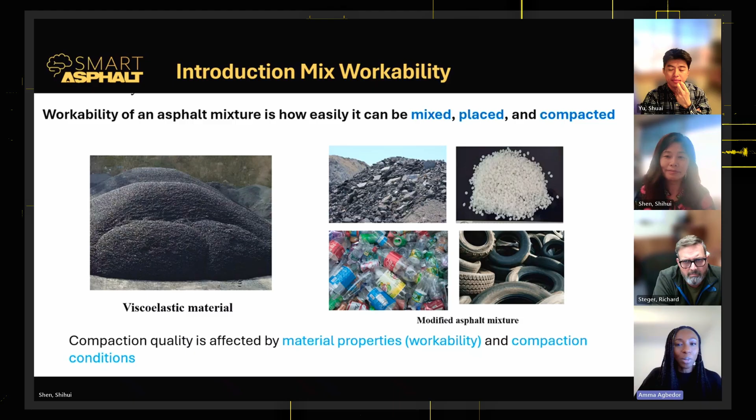Great, thank you so much. And so understanding what workability is, could you tell us about how this led to your research into this SmartRock technology? Yeah. So the history of the SmartRock can be dated back to 2014 and 2015, when Dr. Hai Huang from Penn State Altoona, who is an expert in rail track research, was looking for a tool to monitor railroad ballast performance and behavior. Under funding from the Federal Railroad Administration, Dr. Huang invented a wireless MEMS sensor, SmartRock, to mimic the behavior of railroad ballast under train loading.

The first generation SmartRock is about 33 millimeters, and the external shell can be 3D printed so that it has the exact shape and angularity as a ballast particle. Inside of it, it includes a number of sensing units, so it can measure the translation, rotation, acceleration, temperature, and contact force of the particle. The service temperature of the first generation SmartRock is up to about 80 degrees Celsius, and it has a sleep mode function to save battery life. Since its development, the railroad version, or the large version SmartRock, has been widely implemented in railroad research to study ballast stability, geogrid performance, and track conditions.

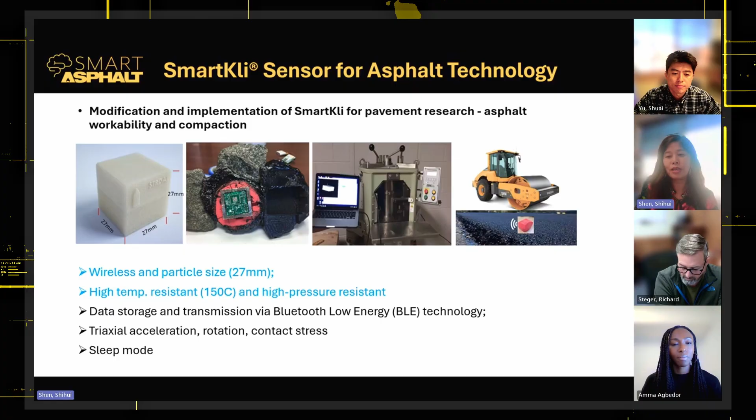All other features like wireless data transmission, rotation, acceleration measurement, and sleep mode capabilities all remain the same. The newer version is trademarked as SmartKli and was implemented to study many asphalt mixture behaviors, including the workability characteristics we are discussing today.

So I guess based on that background history, you engaged in this project to figure out workability parameters that you could use, because you have to have a way of measuring it, right? And I guess that's the work that was done by Dr. Yu, so maybe you can give us some information about that.

Okay, so I'm gonna use several minutes to introduce how we used the SmartRock to do our workability analysis. So during asphalt mixture compaction, we have a central hypothesis that the motion characteristics of the asphalt mixture particles have a direct impact on its workability and compactability. But before our research, how the particles were rotating and moving under the compaction load was still unclear.

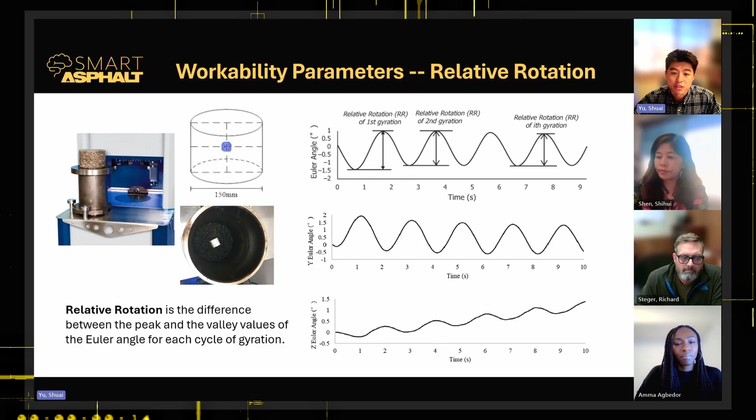So here, we declare a new parameter, relative rotation, which is the difference between the peak and valley of the Euler angle of the SmartRock for each gyration. During the compaction, we collected all of this relative rotation curve, and it shows here. We could notice that at the beginning of the compaction, the particle rotation is more dramatic.

And when the asphalt mixture particles contact each other and the material densifies, the relative rotation starts to rapidly decrease and also stabilizes. So that is the relative rotation curve during the compaction. And we notice that this relative rotation curve is very similar to the change of the mixture height.

So using the same figure, we put these two curves together. The orange curve is relative rotation, and the blue curve is the height of the asphalt mixture. And we surprisingly found that these two curves are very close and even overlap each other. Then we calculated the Pearson correlation coefficient and got a very high value, which indicates a very high correlation between the relative rotation and the mixture height.

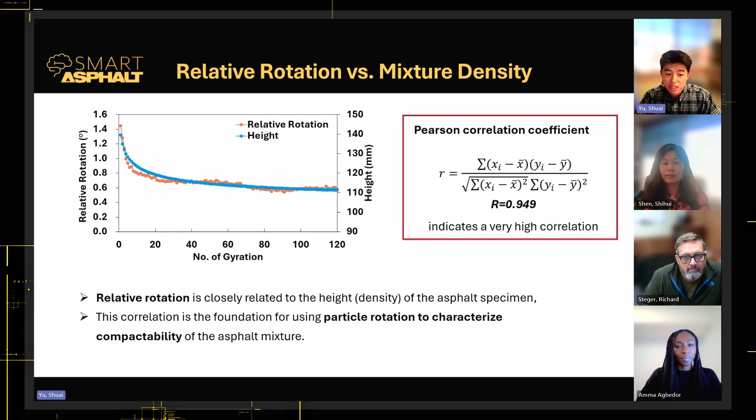And because during the compaction the weight of the asphalt mixture is unchanged, the height is also a very good indicator of density. So we could see that the relative rotation and the density of the asphalt mixture are highly correlated. And that correlation is the foundation of using our SmartRock to characterize the workability and the compactability of the asphalt mixture.

The higher the relative rotation capacity, or RRC, the more dramatically the asphalt mixture particles move, and that means the workability is better. And here's another parameter. If we want to compare the workability between two asphalt mixtures, one way is to use the two relative rotation curves to do the comparison. But we can also take the difference between these two relative rotation curves,

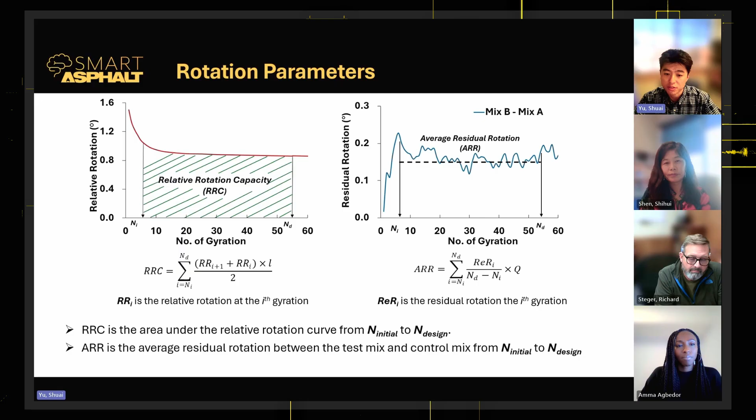And these two curves and these methods were also standardized by the ASTM committee, and you can just find this standard test method online.

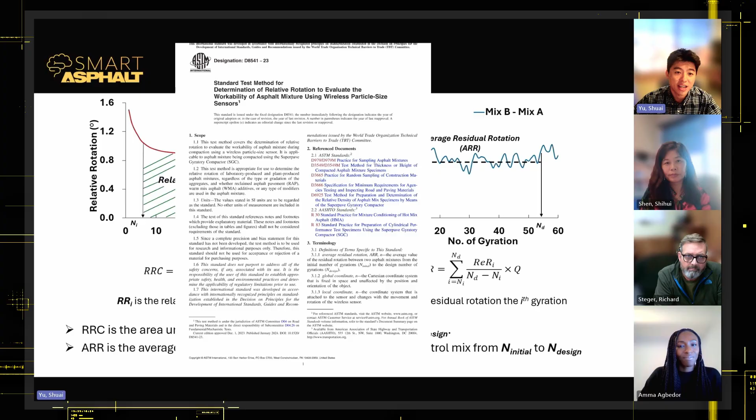And we can also use this method to evaluate mixtures like HMA, WMA, and recycled materials, including RAP and plastic polymers. And we did all of this research, and these curves and parameters all work very well. Welcome.

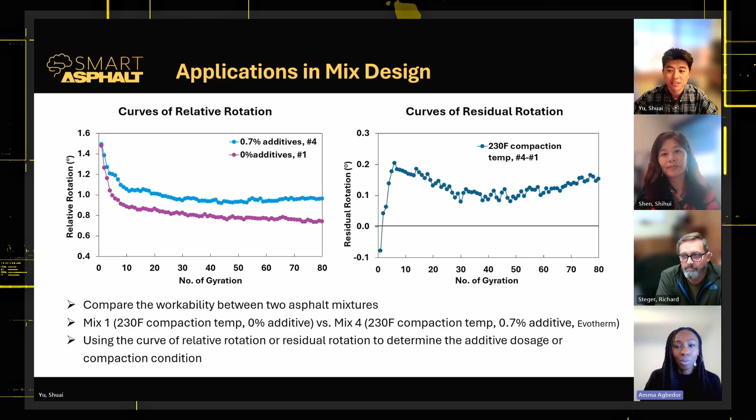So I guess this is a good place to bring in Richard to talk about how you got introduced to this work and the industry application that you see. Thanks, Amma. The way I was introduced to this technology was initially through a poster presentation at TRB. I talked with one of Dr. Shen's graduate students at the time, and she indicated that they were working on this, so I kept track of it for a couple of years, and eventually they had another poster.

I believe it was Shuai's poster on that one, so I followed up with him, got in touch with him, and as you've already seen him explain, it determines the difference between a mix with an additive and a mix without an additive. Coming from an additive supplier, my position with Ingevity, that was of keen interest because we have long struggled to identify a way to measure workability in the mix and quantify that in the laboratory. There are a lot of other methodologies out there, and some work better than others.

But I found that this one worked pretty well, so I thought if we're going to do something with this, maybe I should investigate it more. So I initiated some internal research with Dr. Shen and her research group. We sent them materials, and in fact that was some of the data you were looking at just previously. That work showed me that this method works. It can tell the difference between a mixture that has an additive and one that doesn't.

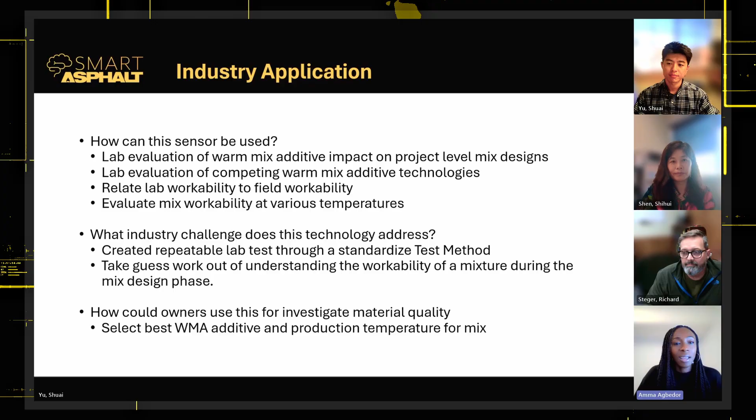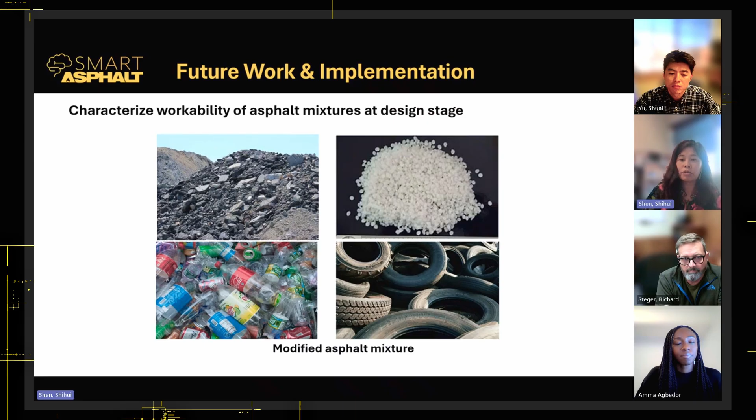Absolutely. Regarding the future work and the implementation, with the availability of SmartKli sensor and ASTM specification, as Shuai and Richard mentioned, I believe this technology can be applied to a wide variety of asphalt mixtures, especially for modified mixtures, like we have been using RAPs and plastic modified mixtures, and also like rubber modified or warm mix technologies, and to see how these mixtures might perform in the field under the compaction conditions. And so this will be a good quality control tool, so that the results can be used for mix design stage to screen out some potential poor mixes, such as tender mix or the mixes that are hard to compact.

If you are interested, this work will be presented at the 2025 TRB presentation, so feel free to check it out. Okay, great. Thank you for sharing that.

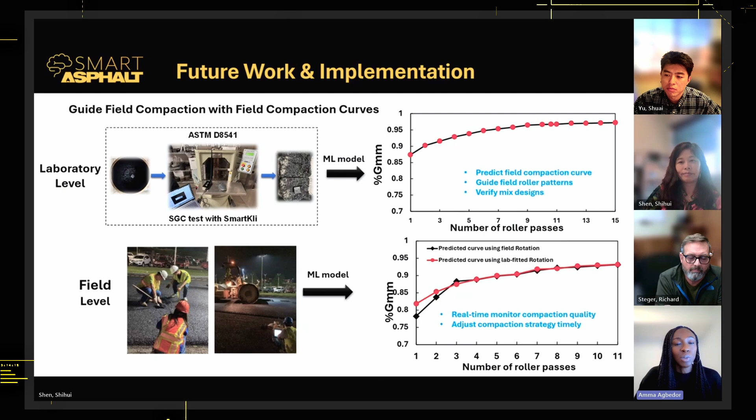Now, I understand that this is a new technology. So what's the availability of this technology if agencies are interested in maybe starting to either specify it or even just kind of research their materials with it? Yes, to help the industry or agencies implement this technology more conveniently, we have developed a full package of graphical user interface and data analysis software in collaboration with RTS, which stands for Railroad Technologies and Services, and InstroTek companies.